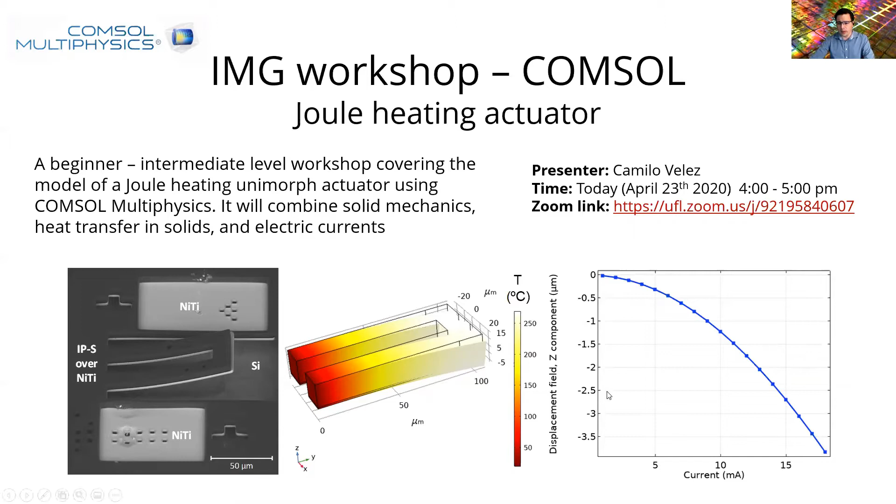So let's start. We're going to assume that people know a little bit about COMSOL, and have done some things. So what we're trying to do is model a Joule heating. I'm going to explain what that is for a unimorph actuator using COMSOL Multiphysics. I'm going to start from scratch, but please feel free to interrupt or ask questions at any moment.

What I'm going to try to cover is some of the geometry and the materials definition, after explaining what is this unimorph actuator. We're going to use some physics: the electric currents, the heat transfer in solids, the solid mechanics, and one that combines the three of them, that is kind of the multiphysics model for COMSOL. At this point, perhaps you're aware that COMSOL Multiphysics is a program that allows us to do multiphysics simulation. It means it's trying to solve the differential equations, the partial differential equations for multiple physics by using the finite element method. So it basically divides the problem into tiny squares or triangles and tries to solve locally for a domain, and it tries to impose boundary conditions and solve for the next domain, and so on and so forth.

We're gonna see the three main components of the studies. It's gonna be, of course, a mesh definition. We need a stationary study, a parametric sweep, and a time-dependent study. So hopefully we're gonna have time to present everything. This model is really very simple, but if we are careful, we are gonna understand this.

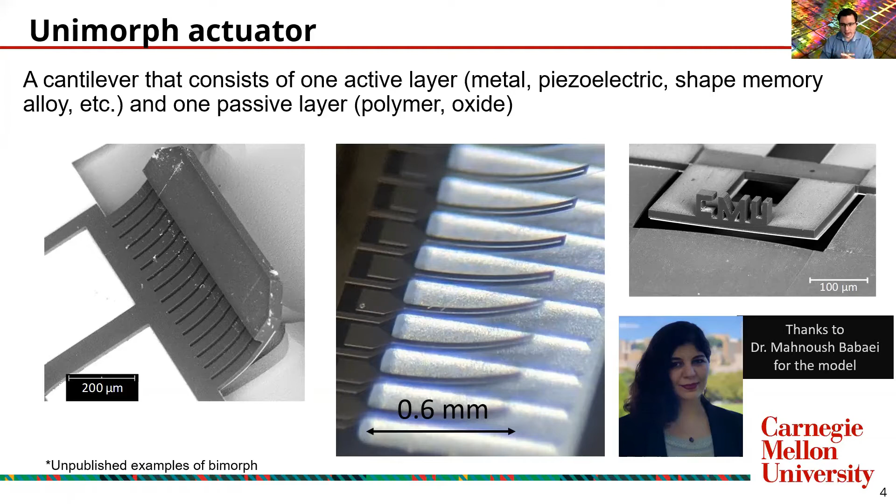I need to thank especially Dr. Mahnoush Babaei. She's a postdoc at Carnegie Mellon as well, and she has been developing most of these shape memory alloys and the model that we're using today.

So as I mentioned before, we have two layers. In a simple beam, it's gonna look like this. One is passive, one is active, and whenever we heat one of these, the temperature is gonna start deforming both materials. Because of the thermal mismatch between the materials, it's gonna start curling down in this case, or depending on the geometry, curl up. For this one, the thermal coefficient of expansion for the passive layer is higher, so it's gonna try to bend forward.

The mechanism we are going to use today is Joule heating. It means we have a metal - this active layer is a metal, we're gonna use nickel. We are going to pass a current through it, and the current is going to increase the temperature on the conductor. We're gonna analyze what is happening in this region, and the change in temperature is gonna cause the transformation and the bending. So it's a bimetal or bilayer problem, and we're just changing the temperature by heating.

So let's start. The geometry is going to be very simple. It's a U shape, basic, and it's 15 micrometers wide and 105 micrometers long. The thickness of the metal layer, which is nickel, is 1 micron, and the thickness of the IPS is 15 microns.

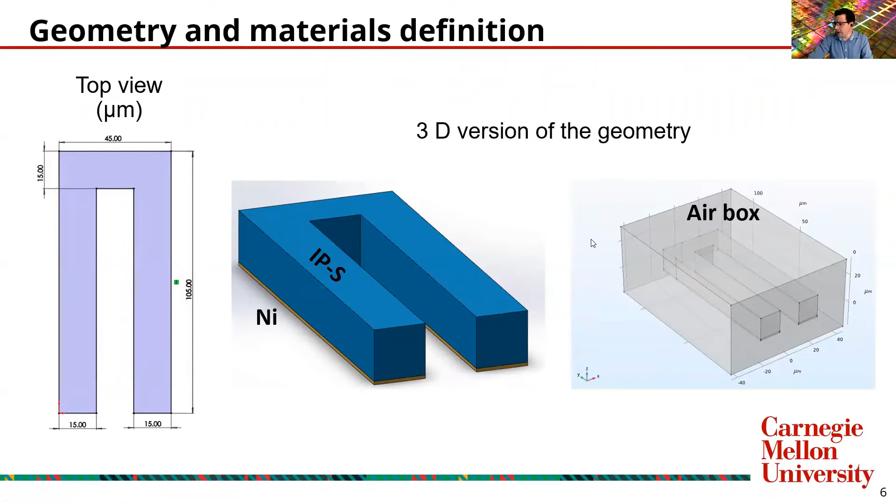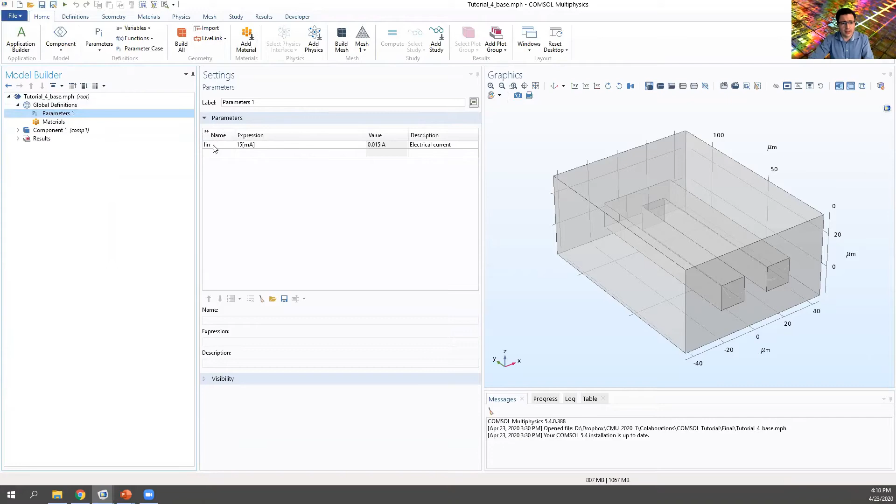So let me jump into COMSOL at this point. I'm gonna jump back and forth between COMSOL and the presentation. For those not very familiar with this, we work here in the model builder, and we have some global definitions. There are some parameters - for example, at this moment we are selecting a current that we call initial current, and it's 15 milliamps. That's the only parameter that we're gonna do. Then we have a big component, and this component is gonna be one single simulation, one nice piece of simulation.

Inside this component, we have the geometry, and I have been working in one work plane. Let me delete this. So basically, in this work plane, I've been drawing these shapes. The first drawing is this box that is 15 micrometers by 105 micrometers long. I just right-click on plane and add a rectangle.

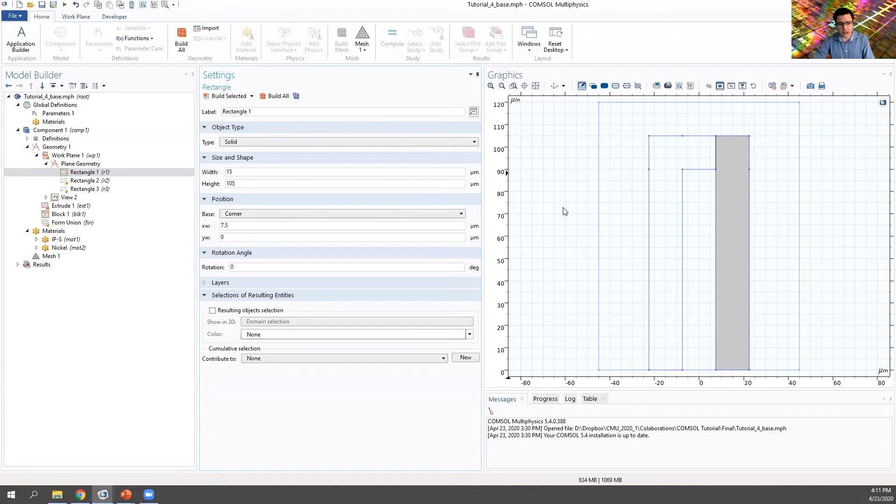And when I add this rectangle, I select the width and the height, and I move this to make it in the center, so I move it to 7.5 micrometers in width. I repeat the same for this other rectangle - you will see that this is 15 microns by 105, and I shifted this corner to 22.5 micrometers.

It's very important that at the beginning you select in geometry the length unit as micrometers instead of meters. Otherwise, the results are going to be completely crazy. So micrometers - we have the 15 microns and 105, and we are missing one component, the top.

I'm adding another rectangle that is 45 micrometers long and 15 micrometers wide. I'm gonna put it at minus 22.5 microns, and I'm gonna move it to the front 90 micrometers. And if I build the selected, now we have this nice shape.

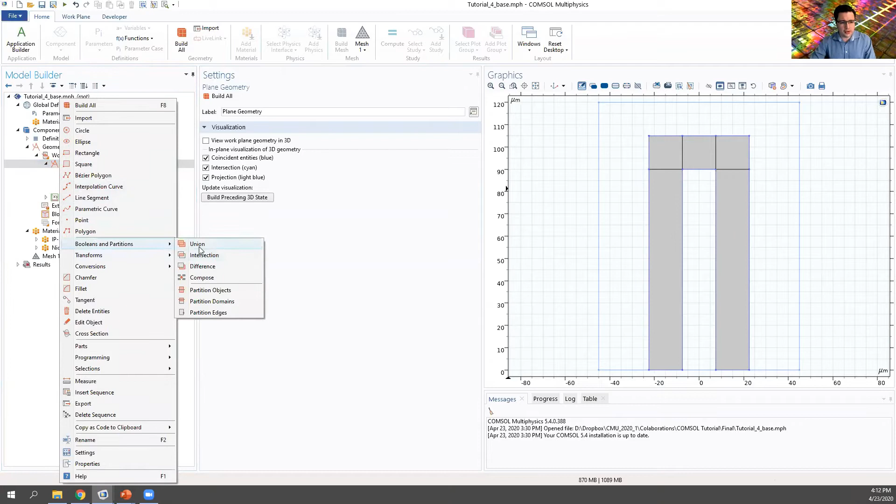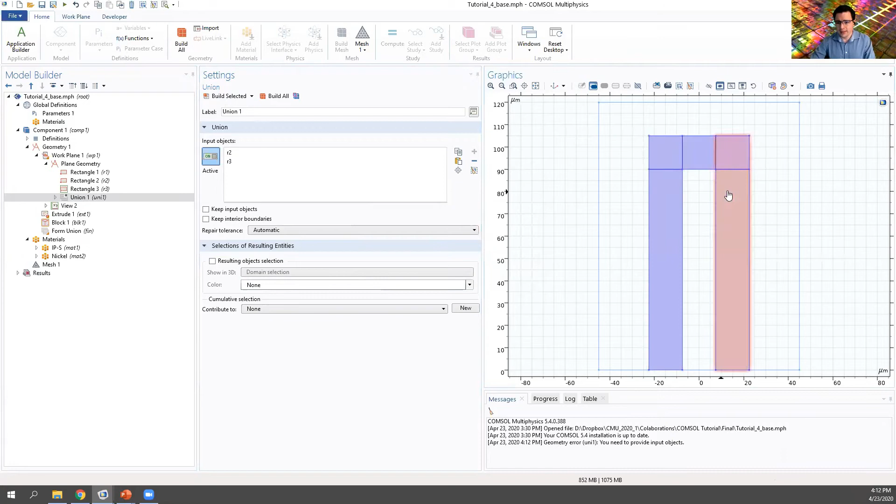For simplicity, because all these represent the same material, I like to use a Boolean transformation - give the union and say please do not keep the interior boundary, so I want to remove these boundaries here. I build the selected - sorry, I need to select the three materials, and I build the selected, and now I have a nice layer.

This is gonna be the fundamental layer for the active and the passive. So let's go for the active layer. At this point we only have this, we have just a layer.

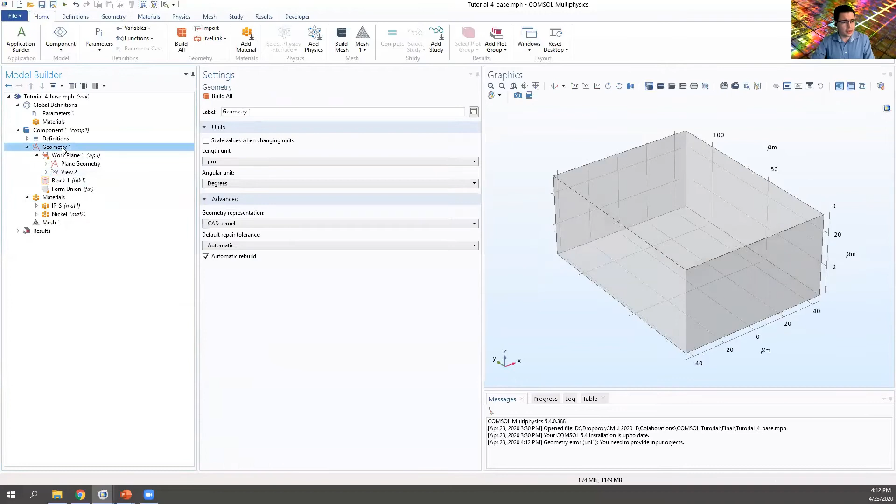I'm gonna right click here and set this plane in the work plane. I hit right click and say please extrude this material. I already deleted it, sorry - I had it for the example, but I want to do it with everybody. So here in the work plane, I right click and say please extrude, and I'm gonna extrude this area. You notice I'm selecting this one. I said please select 15 micrometers and build the selected. Okay, so now I have a nice construction and this is the passive layer.

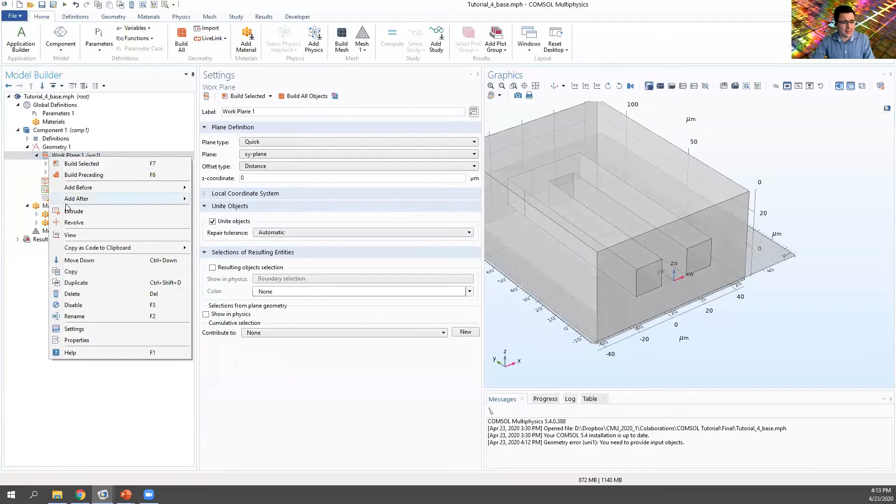What I'm gonna do is duplicate this. Well, let's get rid of the block.

The big block is this one here, and I just right click on the geometry and add a block. I have a nice block of 90 microns in X, 120 in Y. It's very important to understand that this is Y, this is X, and this is Z. And for the height, it's gonna be 50 microns.

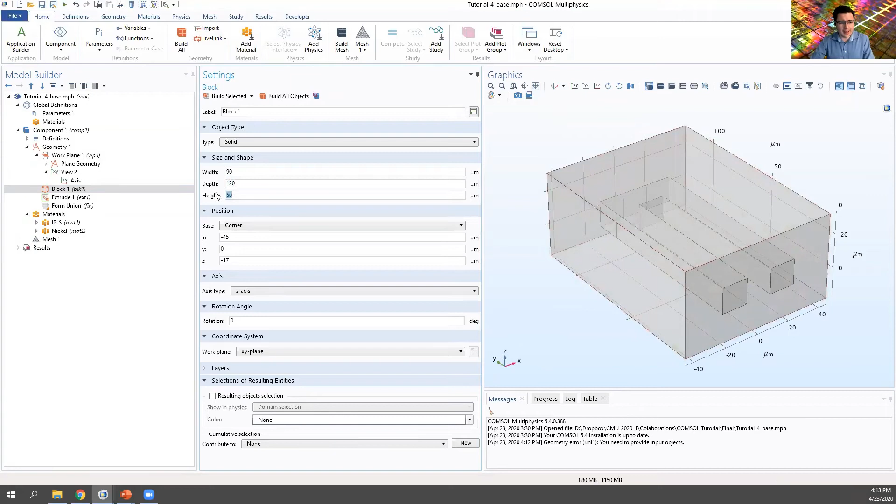But I want this right in this edge, touching these materials. So I move it minus 45 microns in X to be in the center, 0 in Y, and minus 17 in Z, just to be at the center.

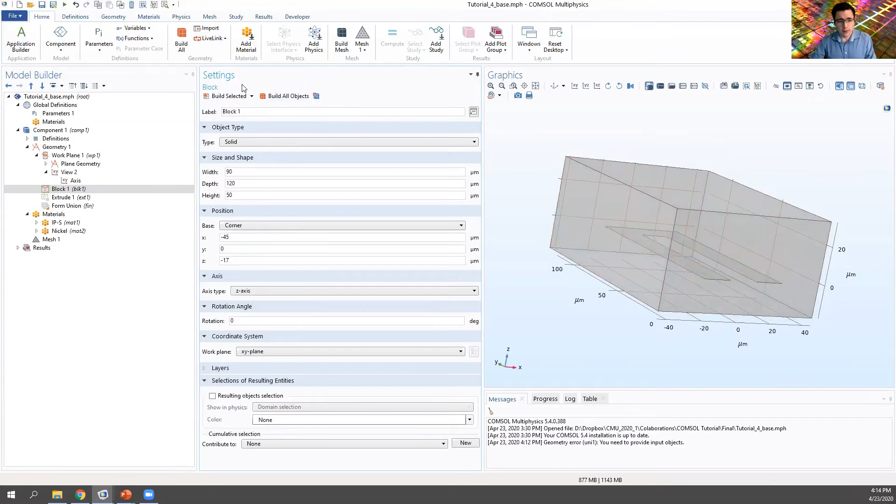So right now I built all the objects, and I have that. The last thing I need to do is define, I'm gonna duplicate this one, the same work plane, to define the active material. So I'm gonna duplicate, it's the same geometry, no need to draw it again.

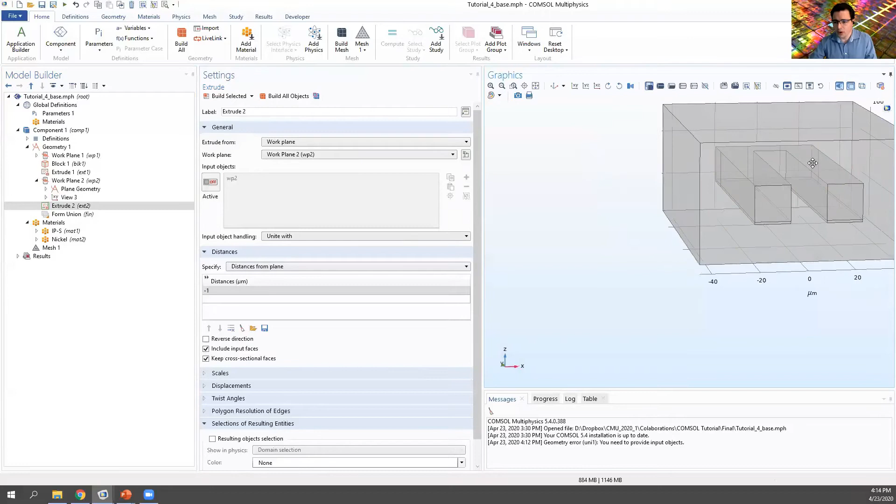I'm going to right click and say extrude, but instead of going 15 microns upward, I'm going minus 1 micron down. So right now it looks like this, where you can see 1 micron of active layer and 15 microns of the passive layer. People will ask me why the difference between 1 micron and 15.

Well, we have discovered that for the different coefficients, this is the thickness that will maximize the work at the end—the force and displacement product at the end. That's why we chose that one after long characterizations and things I'm not gonna present here.

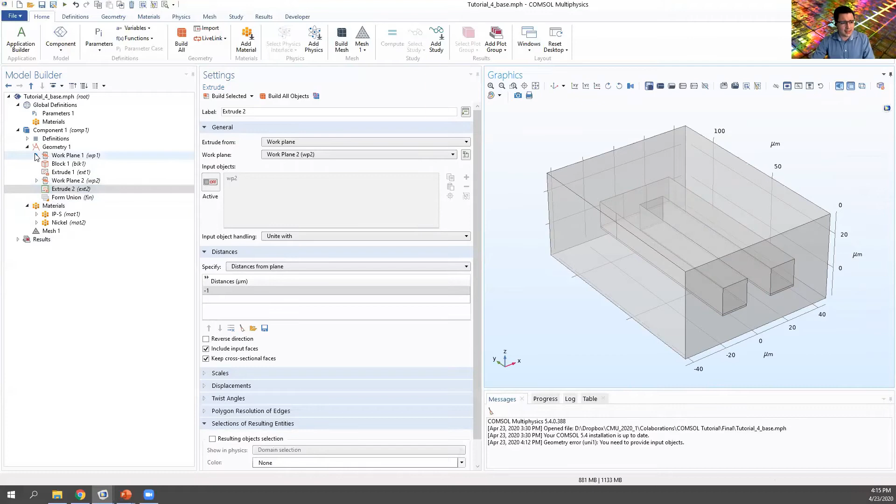The next thing is assigning the material. I already have preloaded 2 materials. One is called IP-S, and I added some thermal values we found in the literature—thermal conductivity, density. The IP-S is a polymer, and we use it as a passive layer because we can 3D print it on top of the metal.

The metal is going to be microfabricated—it's going to be sputtered on top of a silicon wafer. We pattern that one, and then we 3D print the polymer on top. We are using a 3D printer that has a resolution of about 200 nanometers, called Nanoscribe, and the polymer we use with it is IP-S.

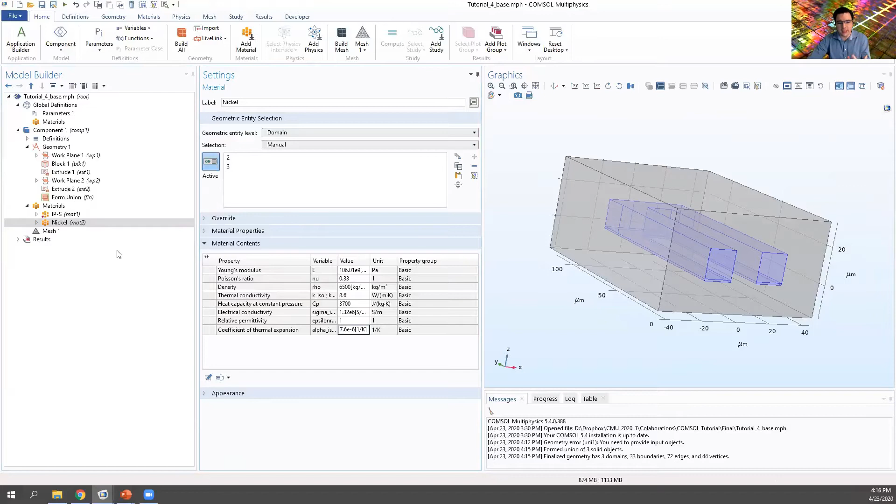So the literature, the vendor, offers a lot of values for thermal conductivity, density, heat capacity, coefficient of thermal expansion. This is the most important one: 52 times 10 to the minus 6. Meanwhile, for nickel, the coefficient of thermal expansion is 7.6 times 10 to the minus 6. So there's clearly a mismatch on this coefficient of thermal expansion.

I need to assign... yeah, I see that somebody's having a question. Let me see.

Yes, we have 2-photon polymerization and we have the Nanoscribe, and that's what we are using for this. So welcome, happy to help anybody who is in need of one of those.

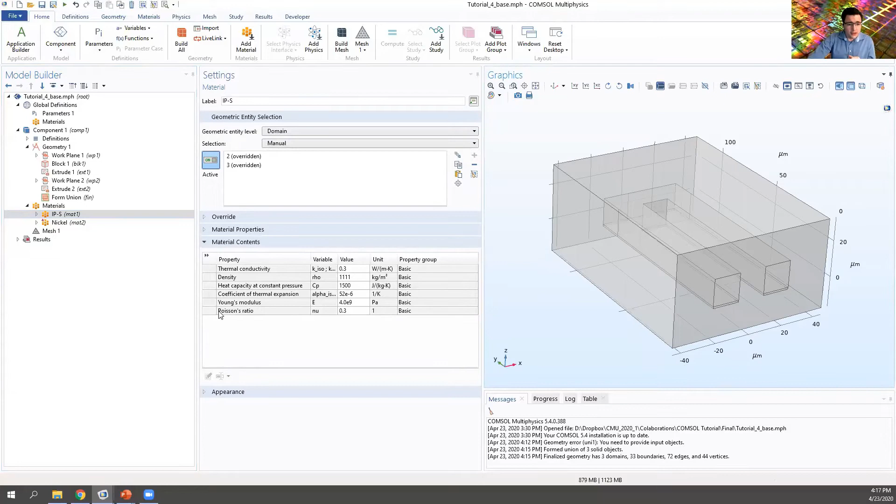We are using this for fast prototyping, trying to understand the actuator better before we fabricate it at mass production. So for this one, we need to assign a model, a domain.

Right now you can use the scroll wheel of your mouse to select different volumes. So I'm gonna right click on this one, select the other one, and right click. Now I'm only selecting the nickel for the conductive part, and for the IP-S it's going to be the other part, the polymer.

I'm gonna add another material, and this is a conventional library from COMSOL. So I right click and add materials from library, and I'm gonna use air. I'll select this material here.

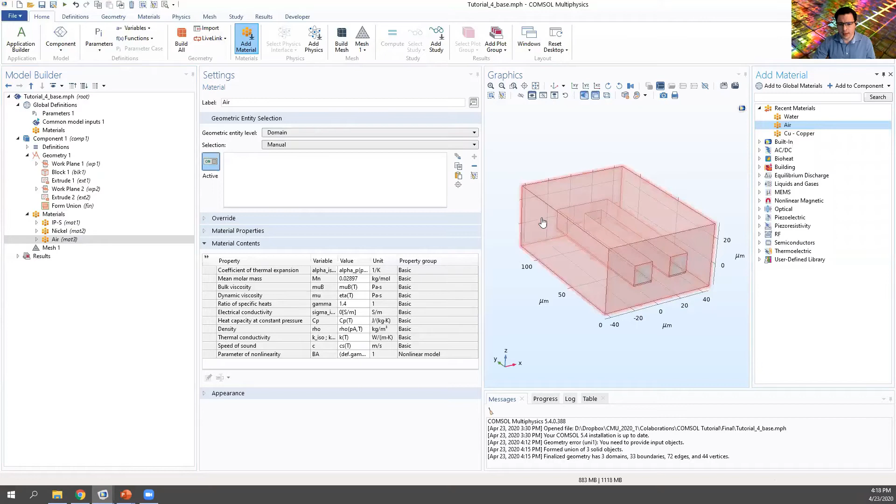Okay, so I have defined all the materials for all the blocks I already fabricated. At this point, it's safe to save this file, just in case, and we can continue with the presentation. Any questions so far?

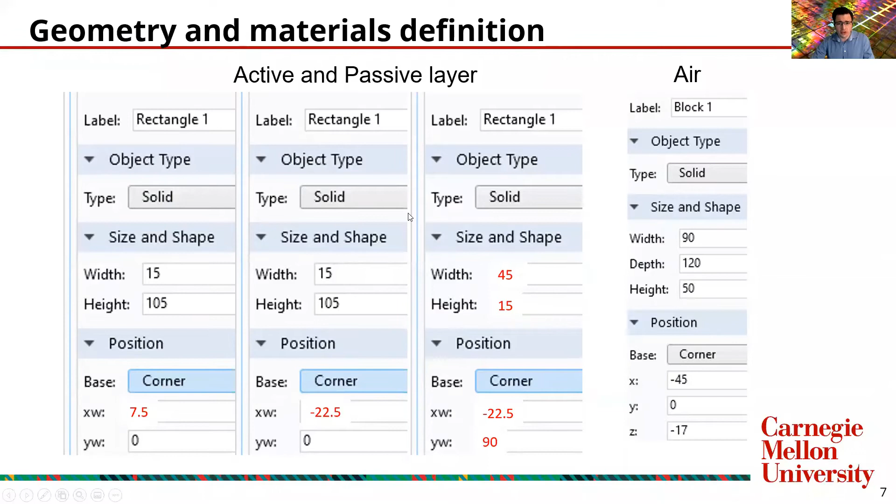Okay, so those are the geometries we defined, those are the dimensions—I'll provide this presentation in case you want them—and those are the material conditions, which we found in the literature.

This is very important: for people who are new to COMSOL, the most important work in COMSOL is validation, okay? And the validation starts from the material properties. We have spent on these modules perhaps 1.5 years just tweaking the simulation, with one postdoc completely dedicated to this. I'm not trying to discourage anybody—no, this is easy to pick up.

The steep curve of learning for COMSOL is going to be like a couple of months, and then you can start doing amazing things. But it's not enough just to have a model, you need to validate it. You need to find out, for example, for your specific material, what is the thermal conductivity? Let's create an experiment to measure this, because perhaps it's not the same value we've evaluated or found in papers or books. Perhaps our material is completely different and the modulus is different, so we need to measure it. So validation on every single step is crucial in COMSOL. It's the most important part.

So let's jump into the physics. Once you understand the variables, it's important to understand that, as with any software, it's trash input, trash output. If you use as input data a value you haven't tested, or an equation you're not sure about, the result is going to be crap, to be honest. So don't expect the software to save you. This is a very complicated software trying to solve very complicated partial differential equations, and you need to own the physics. You as a researcher need to really understand what is happening at the fundamental level. The simpler and more fundamental you get, the better results you're going to get.

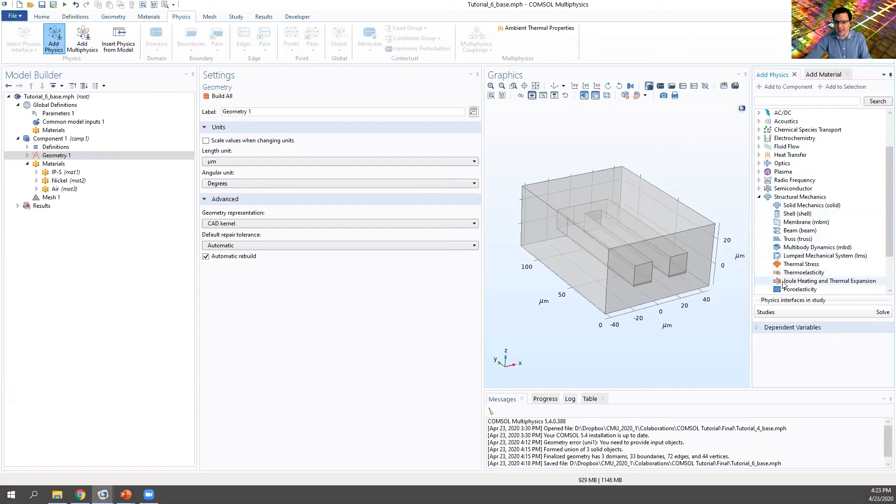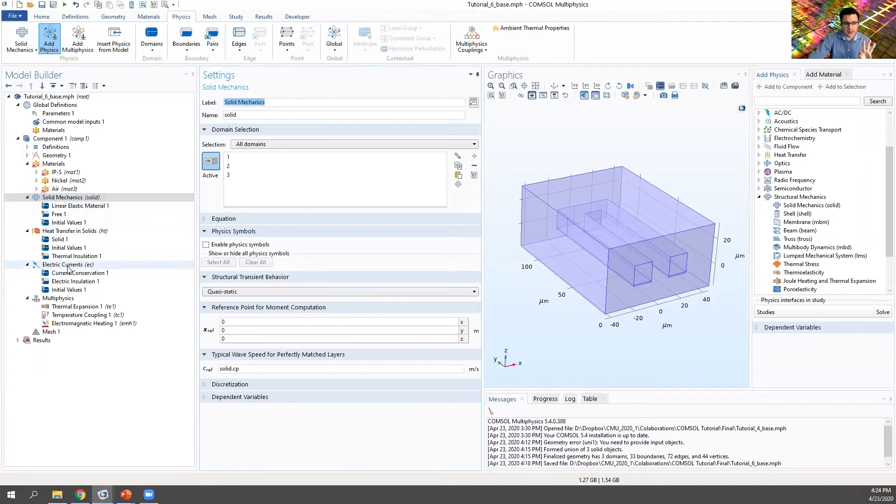In this case, we are going to add the physics. I'm going to add a new physics that's in structural mechanics, instead called Joule heating and thermal expansion. It seems like one model, but in reality it's combining three. If I double click this, you'll see he already populated the system with three modules, like heat transfer, solid mechanics, and electric currents. Let's start with the electric currents because it's the first one I mentioned.

First of all, we're not going to solve it in the air. We're not going to solve it in the passive layer - we're only going to solve it in the active layer. Give me one second to open the model here. Yeah, sorry about that.

So for the electric currents, we only care about this one. We're going to have a discretization that is quadratic - this is just for the solution. The current conservation, we're not going to touch this part. The only thing is we need to change this from non-solid to solid, because this part is solid, it's not air. We're not trying to solve the equations on air, we're just trying to solve them on a known material, okay?

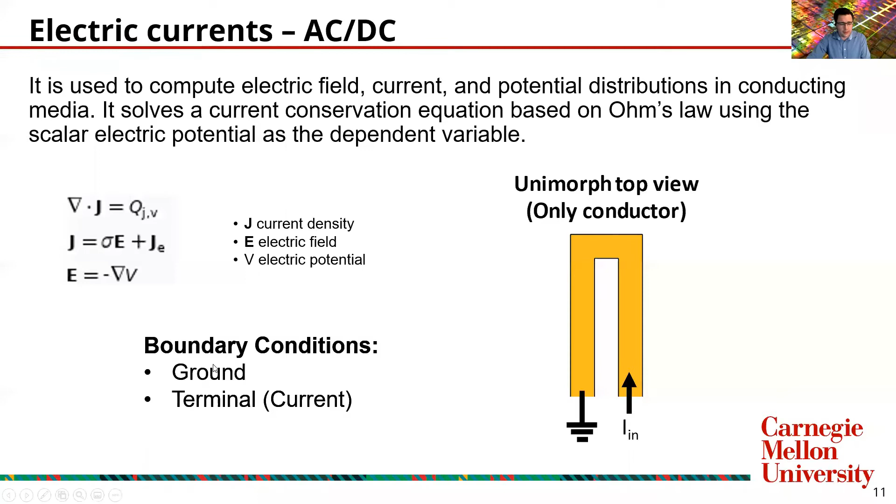So that's very important. The second part, electric insulation, we're not going to change that. The initial value - this is pre-solved for COMSOL, we don't need to change it. What we need to change is add the two conditions I mentioned before, ground and terminal. How do we add that? We right-click on electrical currents, and we say here, on a boundary, okay?

You have three types of conditions: first, a volumetric condition, then a surface or boundary condition, and third, a point condition. You can select those three types in COMSOL, and depending on the condition, you're going to modify the equation.

If you go here, electrical current equation, here is the equation we are trying to solve. Remember I mentioned the electric field before. So if we add more of these boundary conditions, this equation is going to start changing, and we are going to start adding factors.

Okay, so right now we are going to say, please give me a ground. I need to select the ground. How do you zoom? You usually use the scroll wheel, click with the wheel, and move up and down.

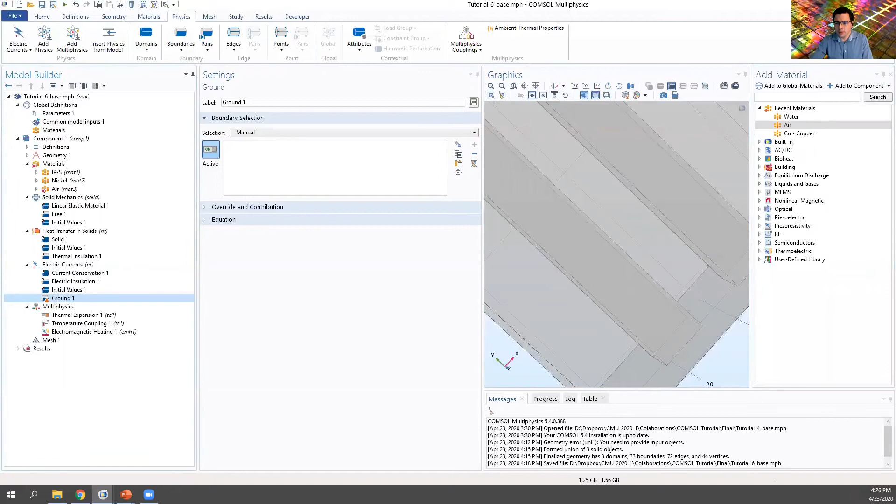You click the wheel and move up and down, and that's how you zoom. Let me close this so we have a better close look. Up and down, and you zoom. If I move the right click and move, I'm going to pan this, and if I move the left click, I'll displace and rotate this freely. This one is zoom out, and this one goes to the original view.

So quickly, I'm going to select this boundary as my ground, and I'm going to select the other boundary as my terminal. So I go here and say please use a terminal, and this terminal is going to be this one here, and this terminal is a current that we have defined in parameters as initial input.

So right now, go to terminal and say initial input. If everything is correct, if initial input was well defined in milliamps, this terminal here is going to be in black. If you define this in volts, for example, you made a mistake.

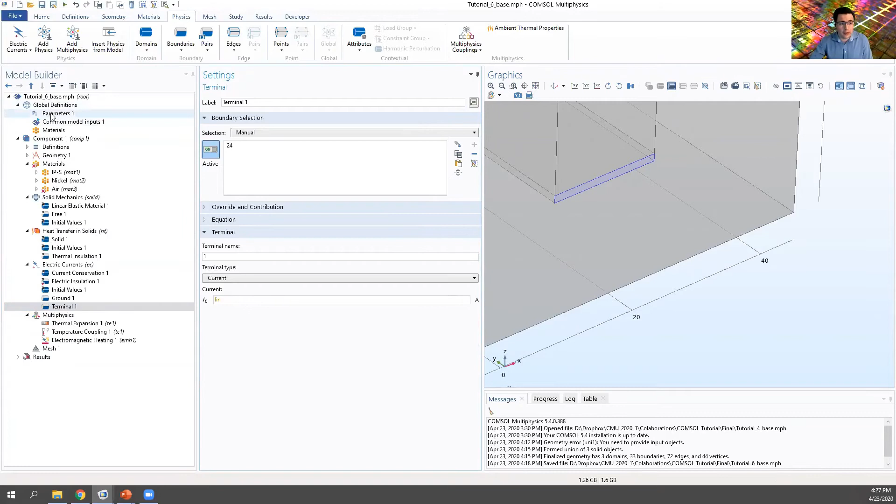Let's say that you make a mistake here. The terminal is going to be in orange, and it's because you have a problem defining this variable here. So that's pretty useful information. Right now we finish with this.

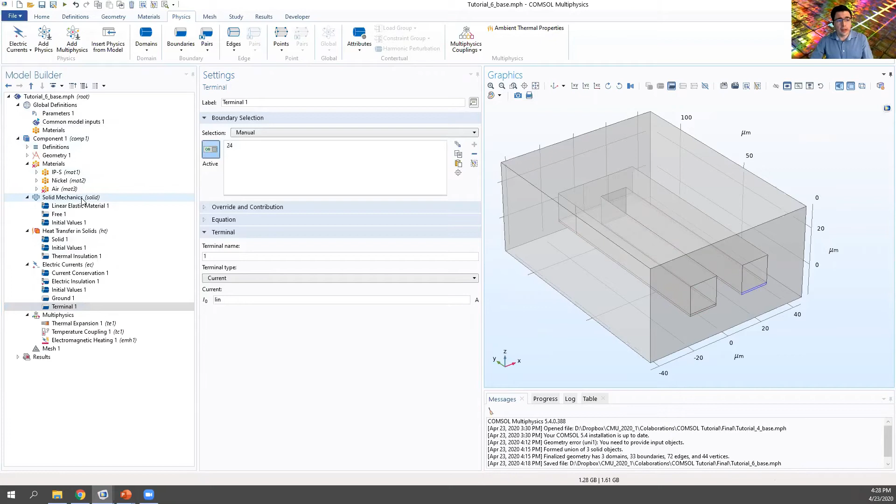I'm going to take this moment to mention something very important here. Look, I know that sometimes COMSOL can be a little frustrating because it has a lot of information, but you need to seek help in the software all the time. The best way to do it is wherever you find a specific topic that you don't know, you go here to help and click in help or press F1.

And if, for example, you don't know which parameters to use in the terminal, wherever you are seated, the help button is going to immediately open a window here and tell you, hey, look, for terminal we mean this. Look, the terminal is a node that provides boundary and domain conditions, and the options you have for this terminal are power, voltage, and circuit.

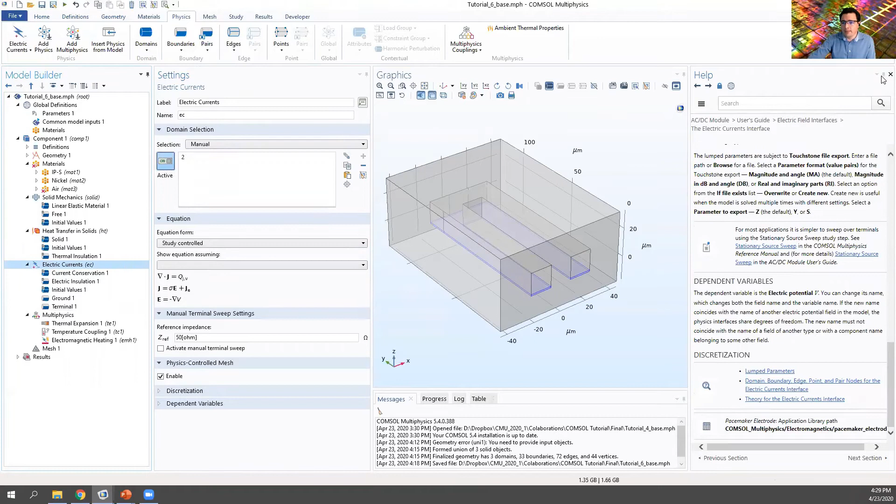So I can change voltage, current, circuit, or terminated, or power. This is the best source of information. If I go to electric currents, it gives me all the information, all the different buttons that I can select are explained here. This is very, very useful. Please use it. I'm going to go back to the presentation.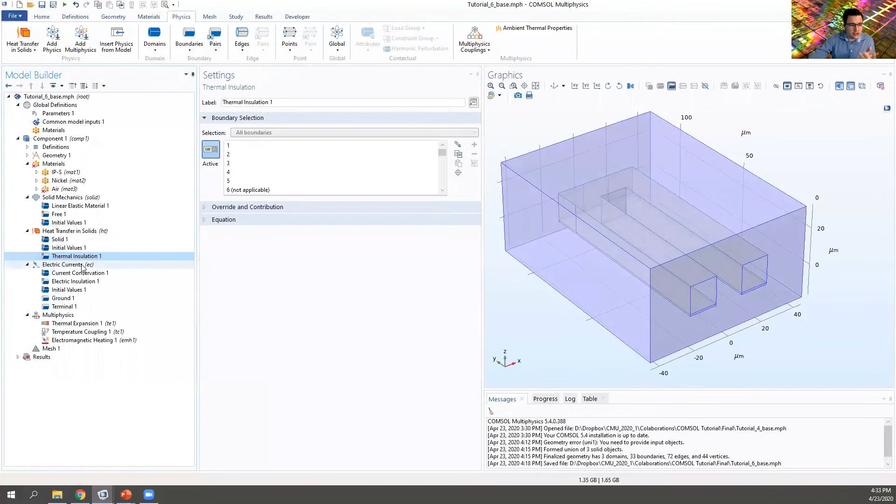So that's why we select quadratic for this specific problem. We have the solid, and we're not going to change anything on this one. And we have the initial conditions and the thermal, but what we are going to add is a boundary condition that sets temperature.

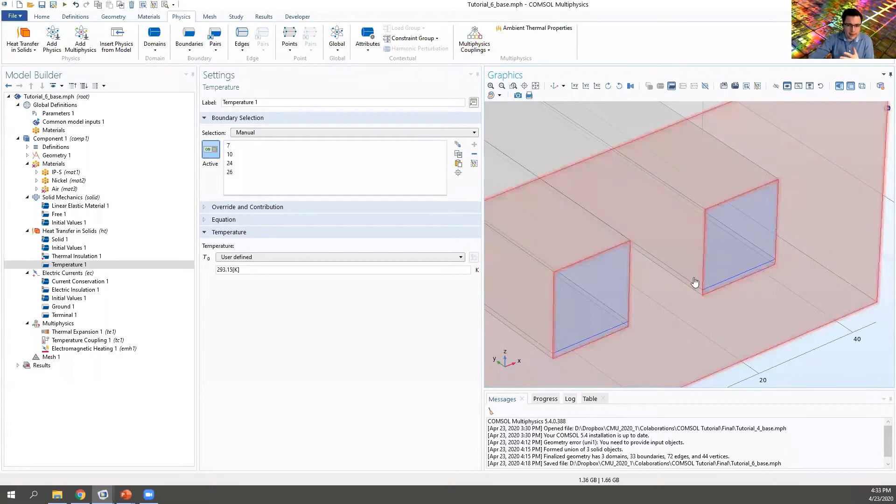And the temperature that we're going to set is for this boundary, this boundary, this boundary, and this boundary. These are connected to the silicon wafer, and the cantilever is going to be in the air at some point. So this is connected to room temperature, and the rest of the beam is dangling in the air, so we need to use a different model for that.

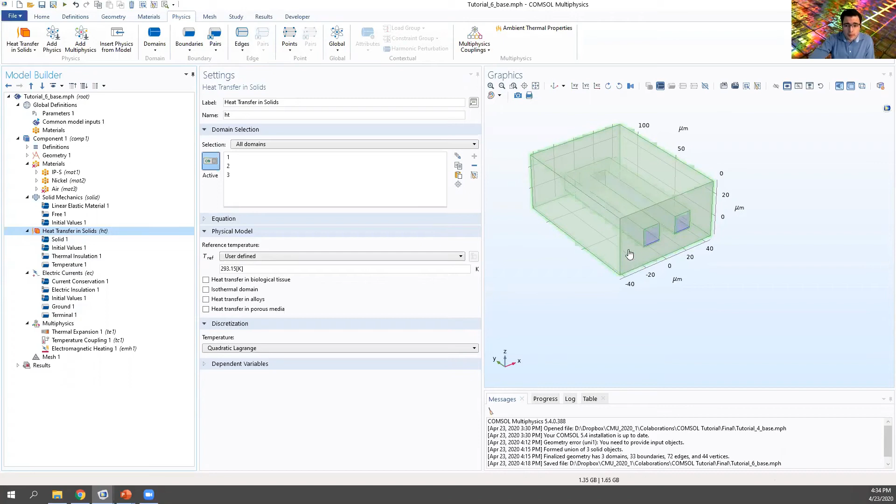Very important, look, because this is a very common mistake: on top of each physics, you need to be careful selecting the domains you are using. Remember, here we are using the electrical domain, but in heat transfer, we are going to use absolutely everything, including the air. So be sure to link it, otherwise you're going to have trouble solving the equation.

So the boundary condition is temperature, and the other one is convection in fluid because we have air. So right click and you're going to hit volumetric condition, and it's fluid - that's the volume that we are going to have. And we are going to select... because I deselected this one. Okay, I have fluid here.

Don't pay attention to this Young's modulus and Poisson ratio, I'm going to remove it in a couple of steps. But here in fluid, I need to describe the fluid that I'm using. Not everything, but just the fluid - the other things have already been defined.

And for this one, instead of being a gas liquid, it's moist air because it's ambient air. So this is most closely related to just common atmosphere under no vacuum. So right now we have fully defined the heat transfer.

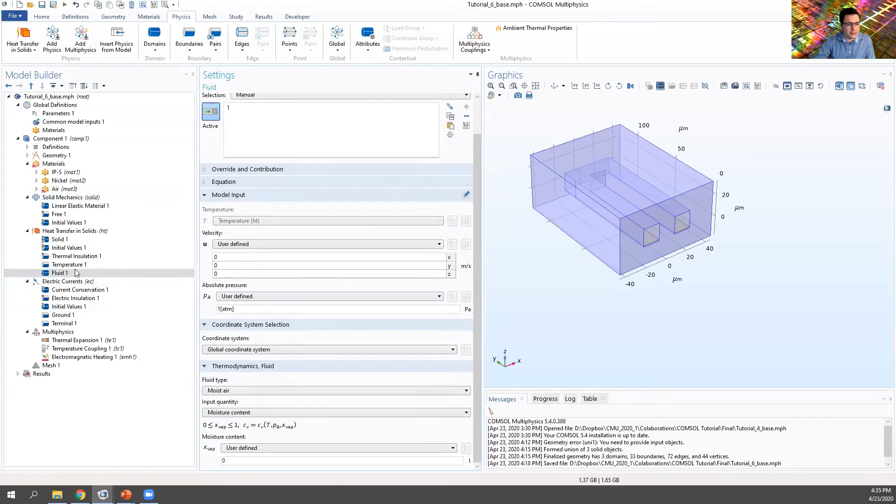So if we go back, the next step is going to be the solid mechanics. Solid mechanics belongs to structural mechanics, and it's trying to do the simulation of 3D and 2D bodies. It has many fundamental equations inside, trying to define displacement, stresses, and strain. I would say it's one of the most common modules in COMSOL - almost every module considers this structural mechanics. So the only thing is, we're not going to be able to see the equations except if we select a specific boundary condition.

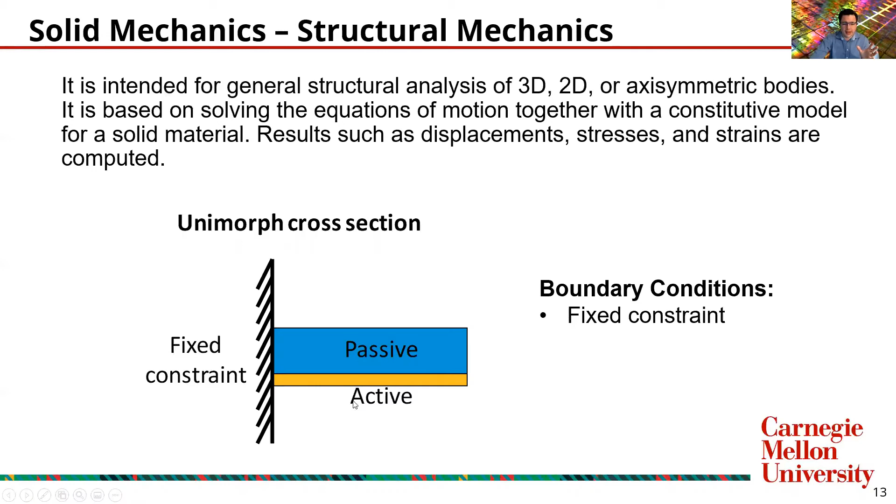The only boundary condition is that this is a fixed constraint, everything else is going to be free and move freely - that's the only thing we're going to do. In solid mechanics, the only thing is that we are not going to simulate the air.

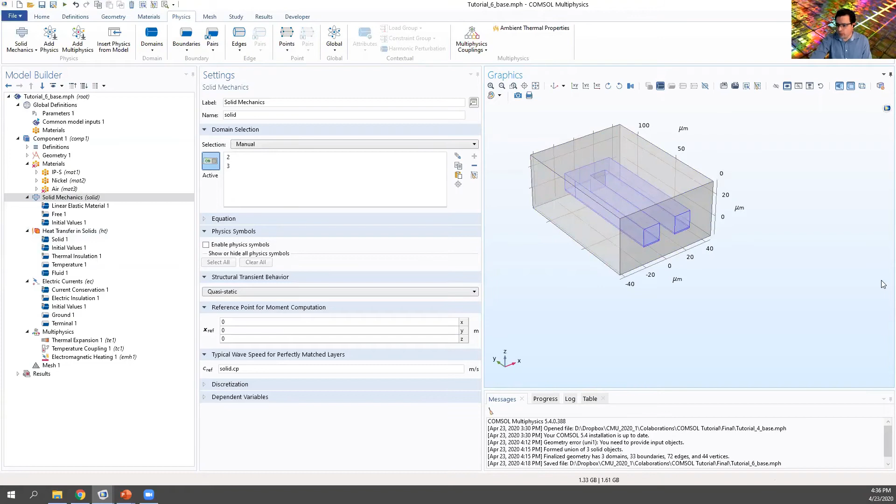We're going to remove the air, and we only care about the beam. The air is just for the heat transfer. So because we just care about the beam, we can remove it here, the air, and select the rest of the model. One important thing here, linear elasticity.

This is already common for COMSOL. Depending on the problem, you will need to change this one, but for this case, we don't need to touch it at all.

And finally, we are going to add the simple condition that is a boundary condition. We said like this is a fixed constraint. And we need to define the fixed constraint for this one, this one, this one, and this one.

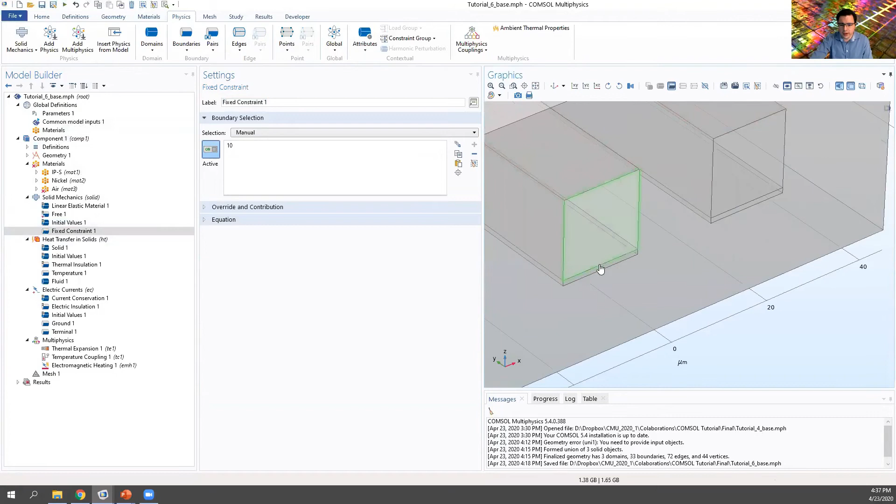If we look carefully, the multiphysics are the combination of all these three. And we are saying, first, we are going to have a thermal expansion, and this thermal expansion is coupling heat transfer with solid mechanics. Internally, it's doing it.

Internally, if you can find the equations and try to see what that is. But the important thing is that they have been selected for you. You don't need to change this at this moment.

I really suggest you start changing these parameters only if you are very confident with your physics and confident with the information that you have for the model. Otherwise, try to follow the COMSOL advice.

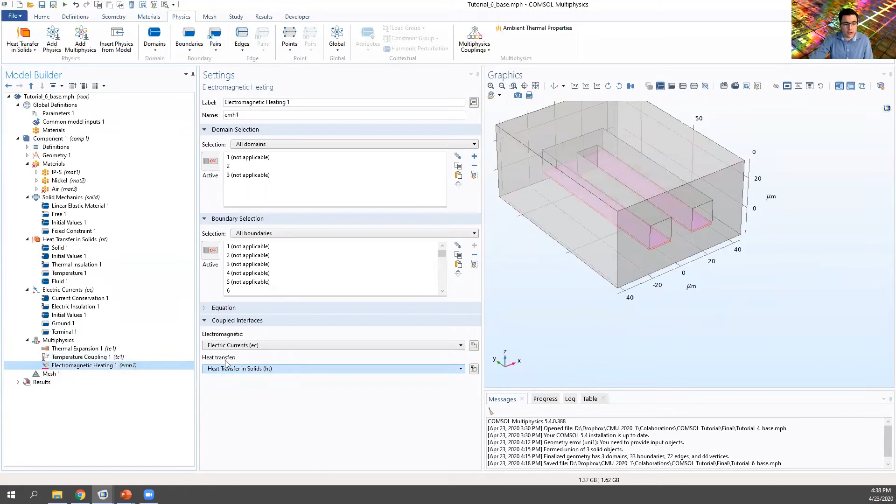Some important thing here is try to use the mechanical losses just to have more accuracy on the domain. We have the temperature coupling, and it's heat transfer and solid mechanics. That makes sense. And we have the electromagnetic heating, that is electric currents and heat transfer. But I'm not doing anything else. After that, I'm going to select the mesh and build all.

Camilo, sorry to interrupt you. I think someone has a question, so I just thought, if you can—sorry. In the chat. No, I'm not able to. Can you read the question?

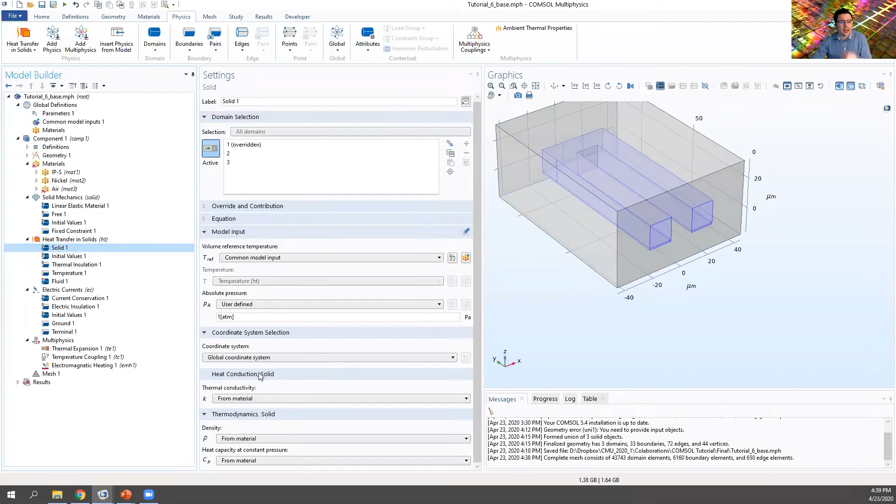The question is, won't the surface contact between nickel and IP-S also need a boundary condition? Yes, you can create a boundary condition for that, but for this specific problem, it's just a conduction material, as I mentioned. And when you use conduction material and you find heat transfer, this solid one, it's doing a conduction module, so they already have inside these two models and coupling inside.

Just in case, you ask about the solid mechanics—no, right now, because for what we're doing, we're just sputtering, and we are observing that there is no effect of one layer over the other.

For a more advanced module, we understand that one of the layers produces an external strain, an internal strain on the other one, and that's where we include that additional layer. But I decided not to include it here just for simplicity on this model. So the answer will be yes, but based on specific cases, not in general. Right now we are just assuming that they are perfectly coupled.

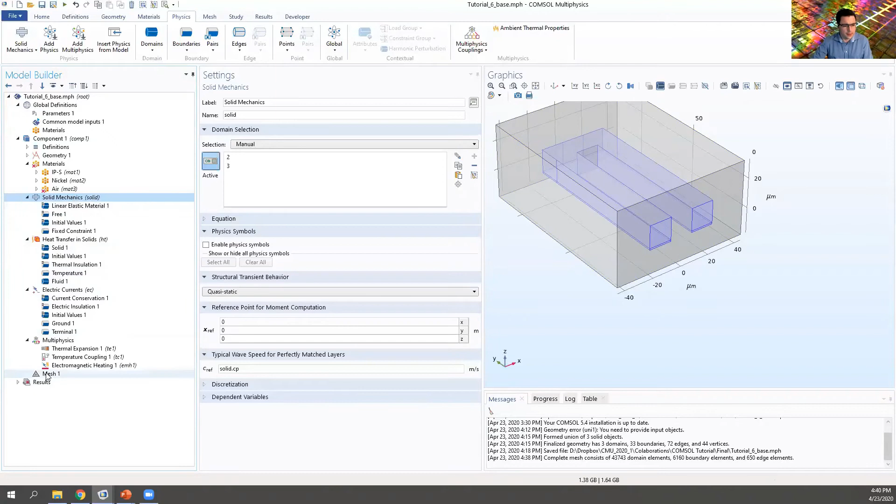It's very important that you define a good mesh. Sorry, give me one second. So I wrote something: that you define a good mesh. Most of the problems that we are going to have, it's with the meshing.

Right now, this model is very forgiving, and we can have a coarse mesh. I'm not going to talk about that one. If you have some special needs for the mesh, please let me know and I can help you design the best mesh for that.

One important problem you can try to solve is to try a very simple model and generate, for example, a volumetric temperature, the maximum temperature, and run it with a very coarse mesh. Then refine the mesh and run it again. Refine the mesh more and run it again, and try to track the temperature for different meshes.

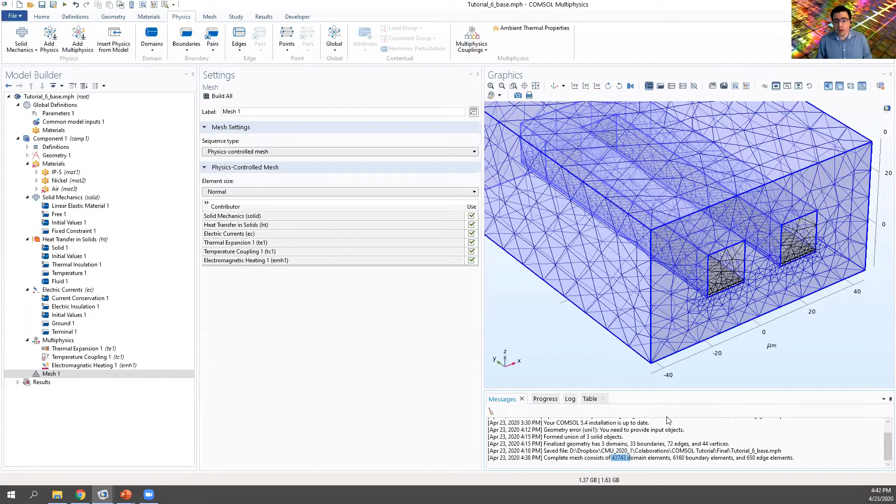There is a point where the model just stabilizes with the number of mesh items, this number of domains that you can see here. Generally speaking, less than 100,000 works good, but it depends on your specific physics and your specific geometry.

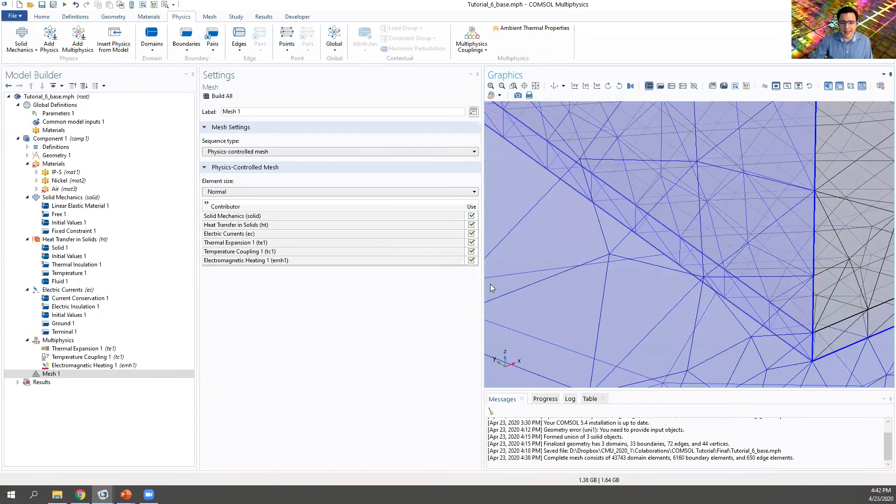If we do, for example, an analysis through the thickness of this layer, look, we only have two triangles here, so it means we only have two data points here, and that's extremely low. So if that's the case, we will need to refine the mesh on this one. But for this model, we don't need it—that's good enough. It depends on your specific attributes and your specific problem.

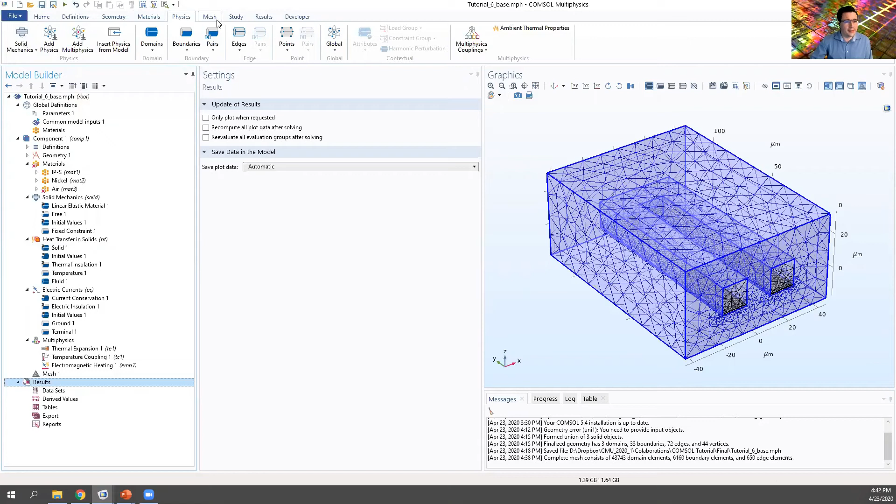Now, the most important part is we're gonna simulate. For the simulation, we just need to add the studies. The first study that I'm gonna add, in the study group, is gonna be the easiest one, the stationary.

If your model is very well constrained, very well defined, this stationary should run very fast. It should take less than a minute, less than 2 minutes, and everything goes smoothly, and you will have a nice solution. This is the first test that you need to do.

If something just pops up, it's because you are missing some of the variables or some of the nodes. You forget to make a click on one specific boundary condition. Look, COMSOL is not taking very long, and it's giving me a result for this type of model. So it's very important that you have this simple test that proves that whatever you have, it's good.

It's part of the validation. You need to do this validation. You need to do experiments, not only in the lab, but experiments here that give you confidence that the results are correct. For example, if you're dealing with currents, just verify that the current multiplied by the resistance is equal to the voltage at all points. Otherwise, you're having trouble at some point, and some material hasn't been well defined. Those little verification points will save you a lot of time and a lot of problems.

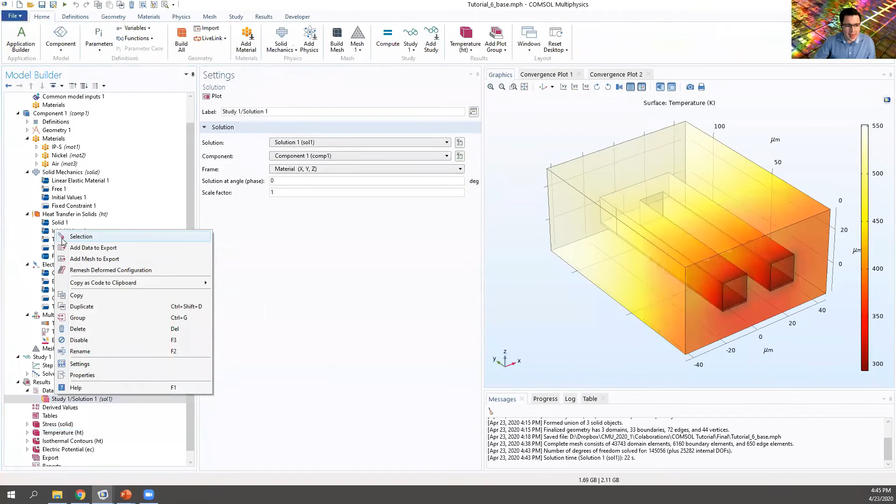In the data set, I now have the study and I can add a selection in the study. In that selection, I can select the domains, and I can say I only want results for the beam, I don't want the air. In the same way, I can use this to click and hide my air. When I do this, the rest of the simulations are only gonna see the beam, and that's the biggest advantage. So that's exactly what you should do to try to simplify your solutions.

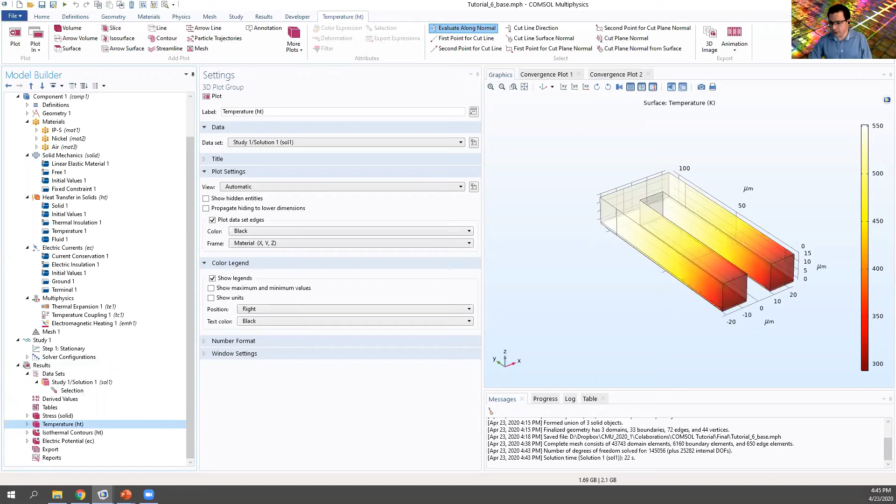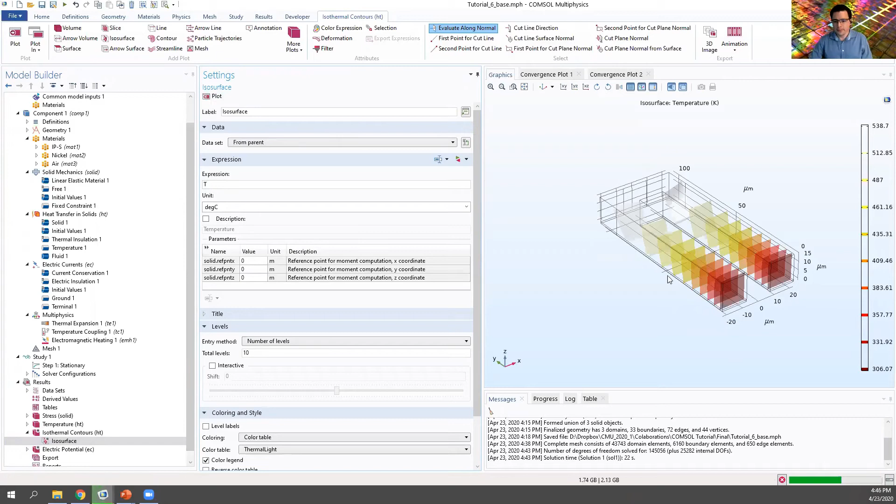The other thing, that's the easy one: this is only one current, 50 milliamps, and I can have the isothermal plots. Right now, I don't want the isothermal to be in Kelvin, I want it to be in degrees C. That's very easy to change. Now I change it to Celsius, and I have the electric potential.

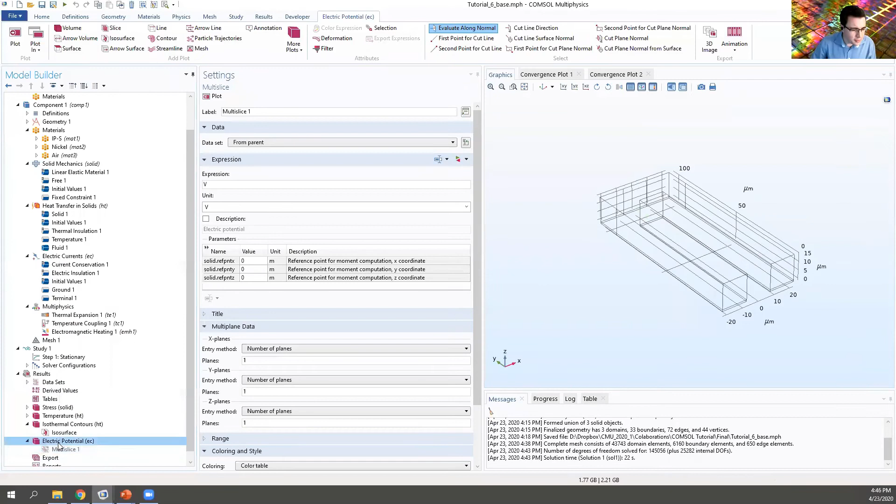I don't like these bars, these slices, so personally, instead of a multi-slice, I try to hide this one. I'm gonna disable it and use just a surface. And instead of the solid displacement, I'll do electric currents, electric potential. So now I have a surface of the voltage, perhaps in millivolts. Look, it's millivolts and the current.

But this is not enough. I need more information. So the next study that I'm gonna add is going to be the parametric sweep. What is the parametric sweep? Now that I define a variable here, a parameter that is current, I want to know for different currents, for example from 0 to 18 milliamps, what is going to be this deflection. Because so far I just find one deflection and one stress, and it gives me only one point. But I want to know a little bit more. So I'm going to add the parametric sweep.

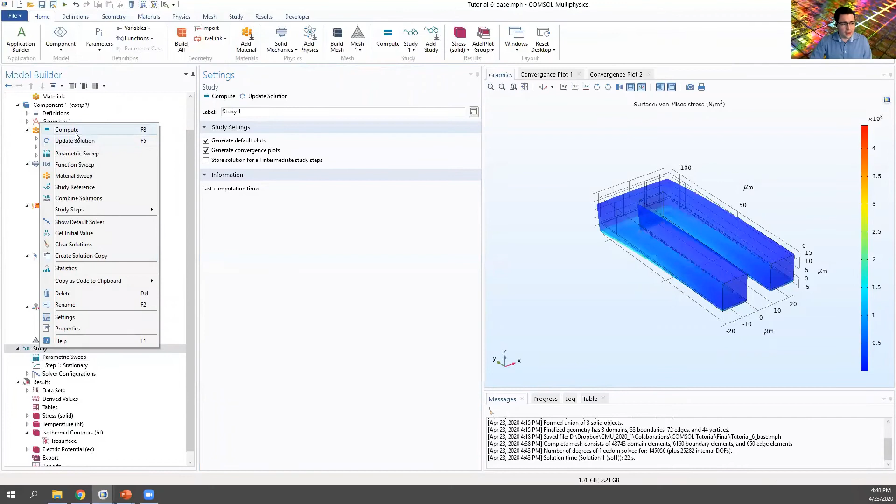In this parametric sweep inside study one, I'm going to add the current, and I'm going to add a range starting from 0 in steps of 1, stopping at 18 milliamps. And then I'm going to run the study, I'm going to compute this part. I already know that this takes a little while.

So let me bring the solution already for this one, because look, the stationary takes like 30 seconds, but if I'm going to run 20 of those, it's going to be 30 seconds multiplied by 20, so it's going to start increasing the time. I already solved all the problems and all the times for this model and did all the solutions. What I'm going to create is just nice plots. So let me save this, I don't want to damage it.

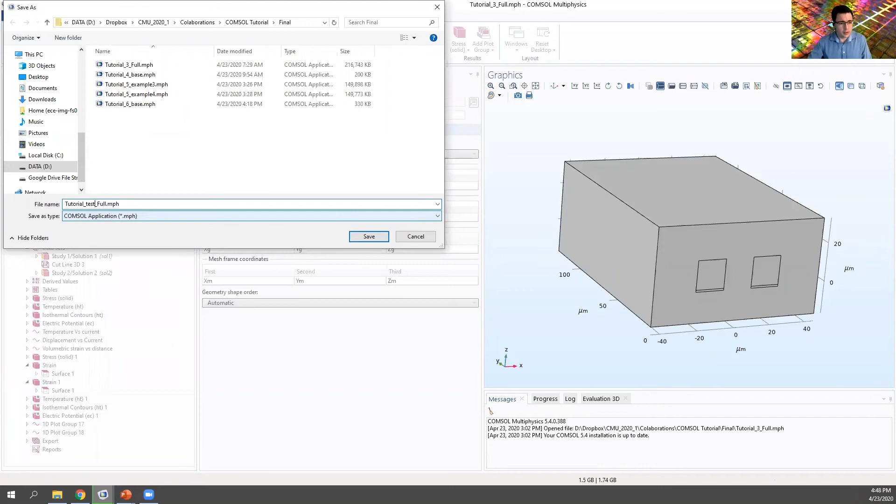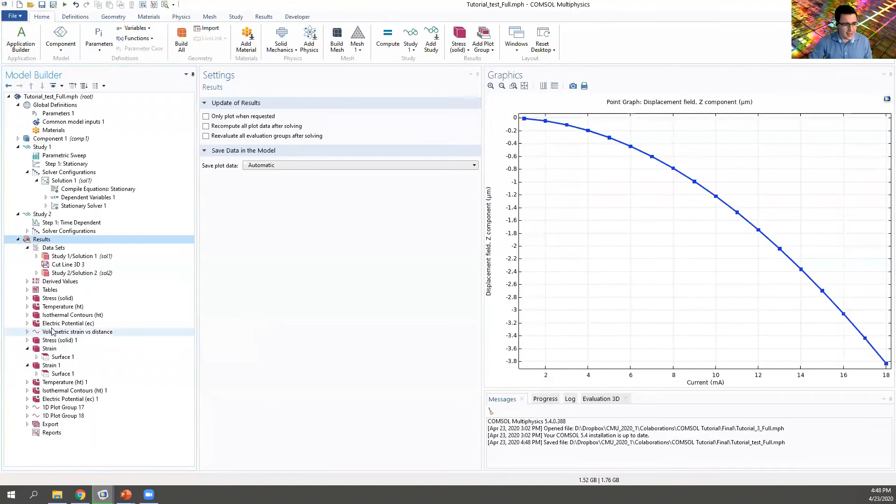What I'm going to do on this model is remove this one. As I mentioned, I already ran the simulation, but I'm gonna do this test with you. It's like a cooking show, you already have the turkey finished. Sorry, give me one second.

Okay, so here's what I'm gonna do, don't pay attention to that crazy one. We have the same stress, but when I finish running the parametric sweep, I'll have multiple values of current from 1 to 18. At different currents, I'll have different behavior. So what is the behavior that I'm gonna analyze?

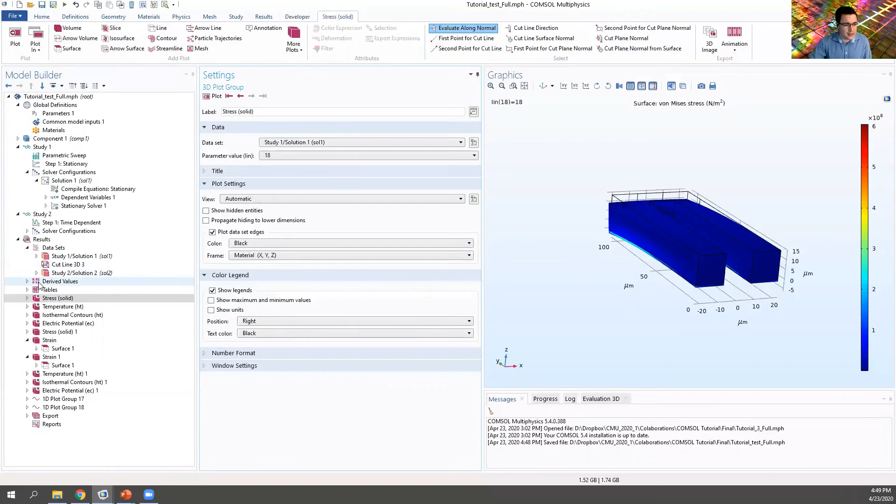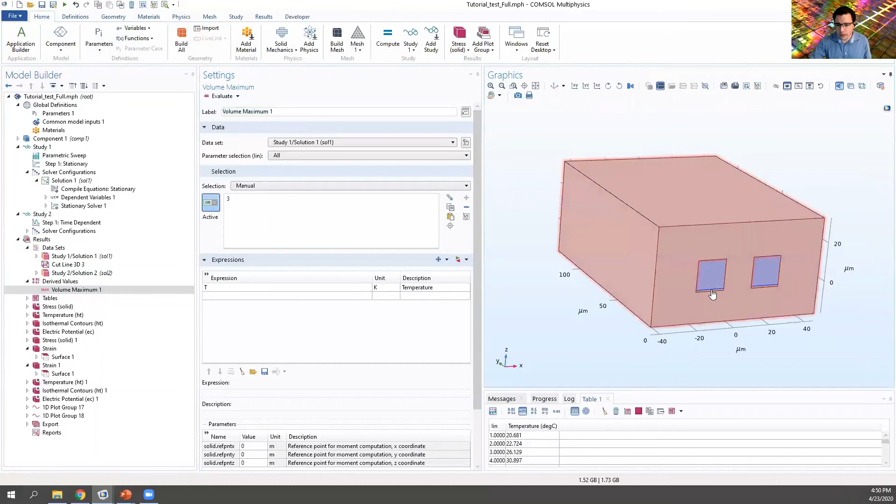First of all, I want to know the temperature at the different currents. So let me remove this. I'm gonna add here in derived values a maximum, and this maximum is a volume maximum. This volume maximum is for the two volumes wherever we have... let me remove this one for clarity... wherever we have the beam. And I'm gonna evaluate the maximum temperature in degrees C, then hit evaluate.

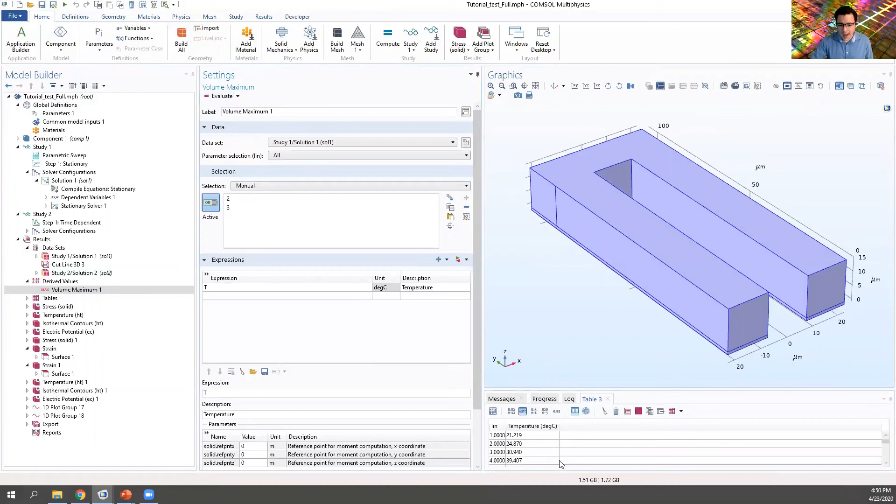And now that we evaluate, we create a nice table here, table 3. Let me delete these ones, it was from the previous model that I ran. But this value, I'm gonna evaluate again, and immediately it pops up a table here, table 1.

What I'm gonna do is right click a 1D plot, and in this plot add a table graph. The table I'll use is table 1, and I'll say plot. So right now I have my input as current from 0 to 120, and it's running the temperature between 20 and 380 Celsius. That's exactly what we wanted for this model, what is the temperature.

Now, after knowing at different currents the different temperatures, the next question is, how much is the deflection? So I can right click and add a 1D plot. At this point I'm not gonna generate a table because I'm gonna do a measurement of a single point, and the single point is gonna be this little fella here. What is the deflection, and in which axis?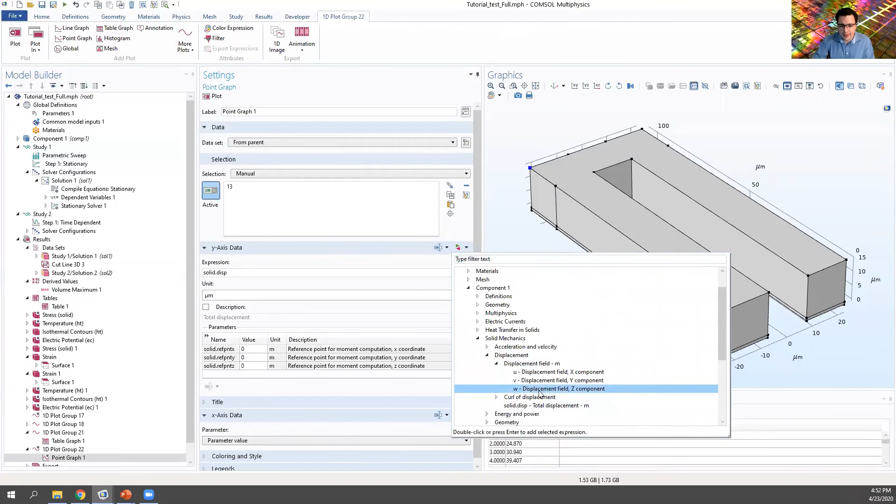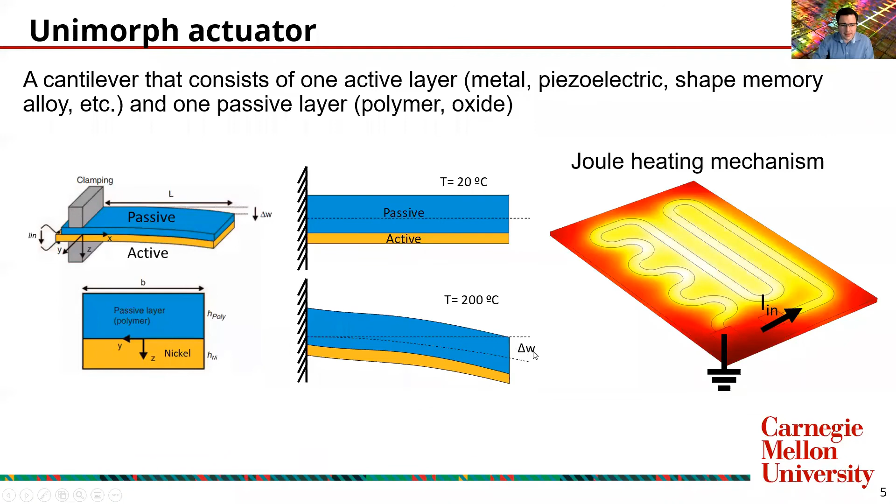So I'm gonna change here to replace the expression, and I'll say, okay, in the solid mechanics, what is the displacement field, and what is W? W is the displacement field for Z, the Z component. If you remember, when we started defining this at the beginning, I said the displacement here is my delta W. That's exactly this W that we're managing here.

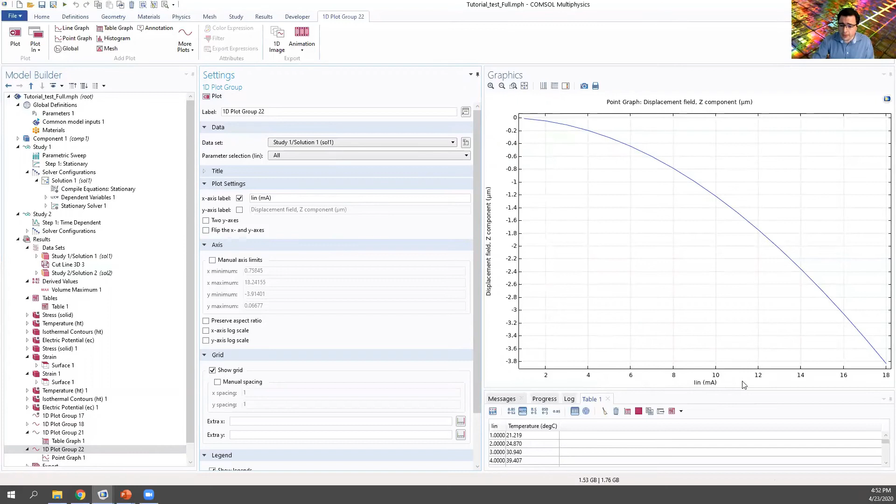And if I hit plot, this is telling me, okay perfect, look, for my different currents in milliamps, 2, 4, 6 — and if you want to change the milliamps, you just go to label and just say the units, milliamp. And now we have the milliamps here. For different currents, I'm having a displacement of -1, -2, -3, and the maximum displacement is going to be -3.8 micrometers for 18 milliamps.

So now we understand what is the temperature, look, the temperature — and I can rename this, this is going to be temperature versus current. And this one I can rename, this is going to be displacement versus current.

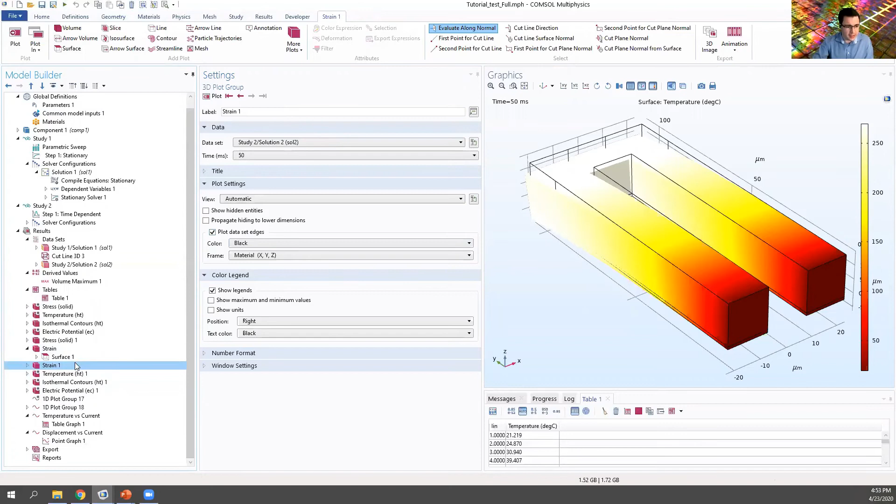And the last one I'm going to generate is, I'll duplicate the strain. I'm going to try to evaluate the three things: the temperature, the stress or the strain, and the current versus displacement. That's what we need. So I have from the stress, the stress solid, usually the von Mises simulation that COMSOL gives you. I'm gonna duplicate this one and do a little modification, call it the strain of the material as the original, the Strain3. I already did other strains.

What I'm going to do is, instead of doing a surface from the parent using von Mises, I'm going to use a different method to calculate the strain. It's not going to be a numerical approach, I'm not interested in the number, just an approximation of what's happening with the strain. I want to know where we have tension and where we have compression. So in solid mechanics, I'm going to select the elastic strain tensor, the 2-2 component. Let me verify I have the elastic strain tensor, EEL22, yes, okay.

So in my elastic strain tensor, now I can see the strain in the material. Again, this is a qualitative approach, and I'm not very concerned about the numbers or units. It's just the model in Y, the 2-2 is the Y component of the strain tensor.

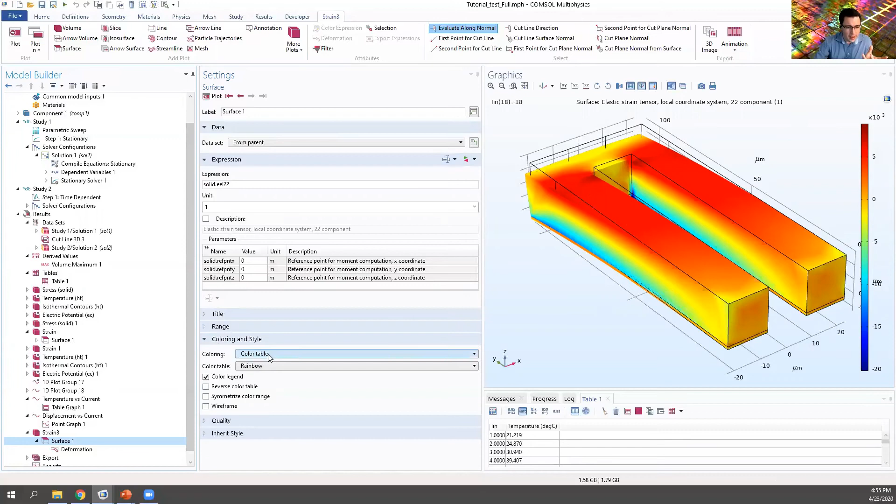And I want to see it in a different way. Instead of rainbow, I'll show the wave, because the wave shows positive as red and negative as blue. I'll set symmetrize color range, so it's going to be positive and negative, using the same value, -20 for negative and +20 times 10 to the -3 for positive.

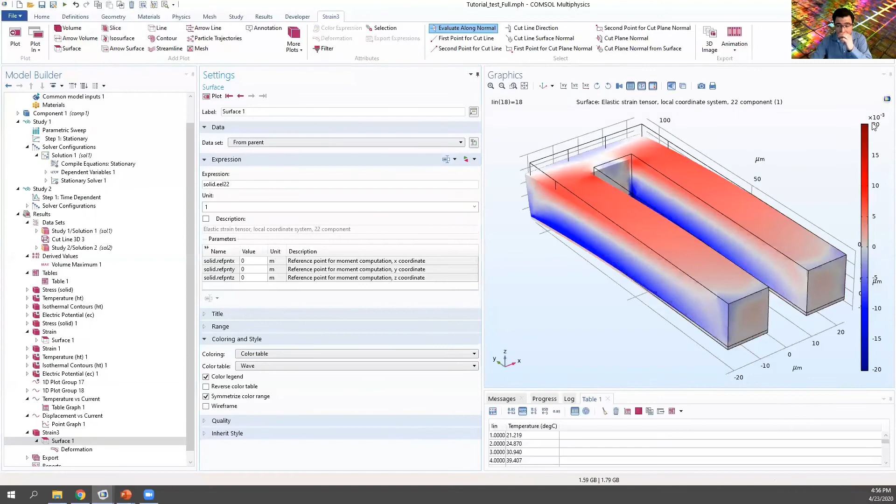So what I have now is, for the different currents, an indication of where we have strain, tension shown in red and compression shown in blue. For the two films, it's very different. This gives me a graphical representation of what's happening in the field. I have tension on the polymer at this point, and this polymer here is under compression. Using this information, since I did a parametric sweep, I can use the player.

I can create a nice simulation or video of at least 25 frames at different currents, showing what's happening with the beam, and if I play it again, how the strain behaves at different currents.

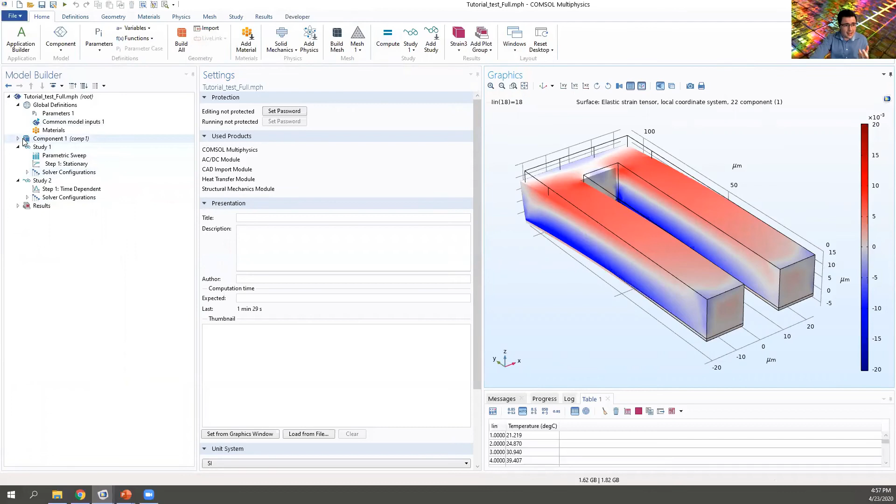So to summarize and open the floor for questions: we used the Joule heating approach that COMSOL has built in to couple solid mechanics, heat transfer, and electric currents into a Joule heating actuator. We pass currents to heat up this conductor, which deforms the passive layer and causes it to start bending. With that, we can understand temperature versus current, displacement versus current, and ultimately how the beam behaves, where we have tension and where we have compression. That's exactly the goal of this tutorial.

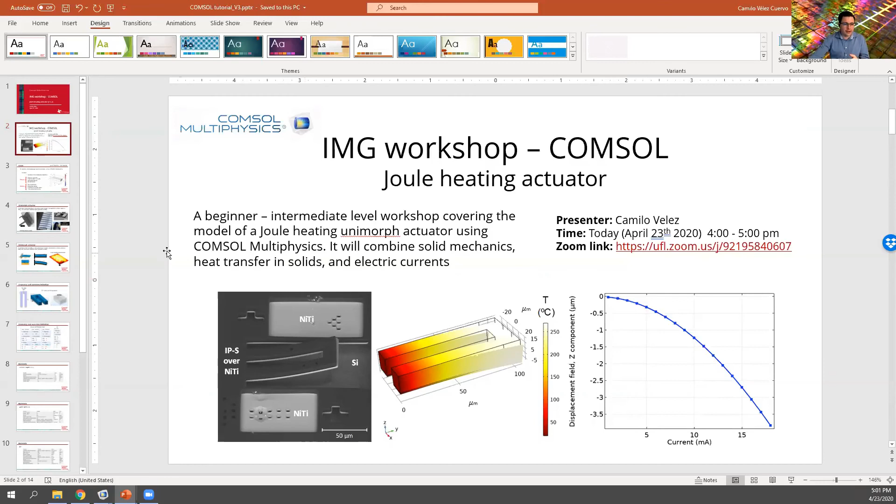A simple thing you can use is run the model without running any specific physics. So for example, run the easy one, the DC. Run AC/DC with a variable called temperature, and temperature is a quadratic function of the pressure, for example. I don't know, I'm just making up things.

So running the electrical current, you're going to have a solution of that specific variable, even if you are not using that variable there. And you will have an evaluation of what the variable is doing at different temperatures without damaging the model. Once you verify that your model is accepting that inner variable, you can do it.

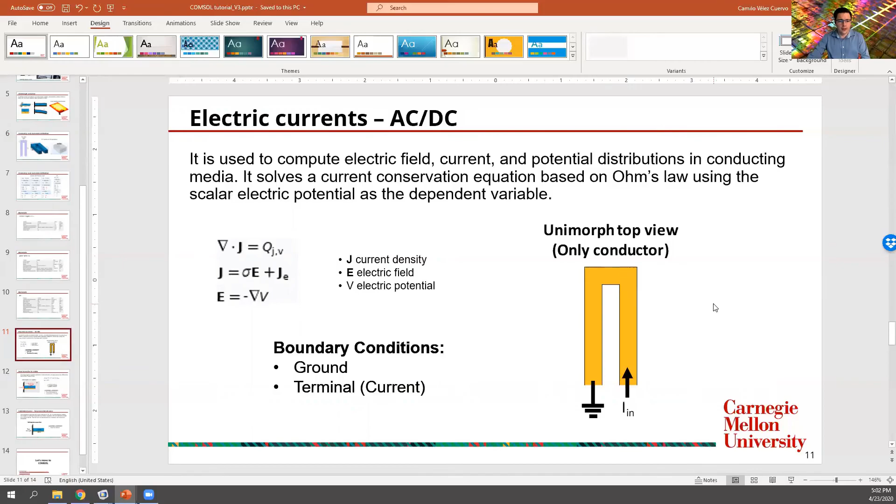One way we tried to use it in the past was in magnetic materials. But we observed that instead of doing a parametric simulation with a function, it was better just to define it in global definitions—sorry, not here, in component, inside the component and definitions, to define a function here.

So do not run the study based on that function, run the study based on a parametric value, but compute the function value. For example, a function x squared of something—just create the function x squared, but do not try to run parametric to the function, run parametric to x, and calculate all the time x squared. That seems to work a little faster for COMSOL.

Okay, yeah, I'm having some issues with my own simulation now, so this is helpful. We can see it offline if you want.

Yeah, sure. But anybody else, do you have any questions? Come on, this is one of your few chances to ask tons of questions about COMSOL.

And the last piece of advice is to go use the other sources of documentation, which are very powerful, use examples that are already there, and use the webinars that COMSOL offers. Please, everybody working with COMSOL needs to register on the COMSOL website. Your group, IMG, is paying a lot of money for the license, so everybody can just send an email and ask questions. Of course, the better you understand your model, the better the answer you're going to receive.

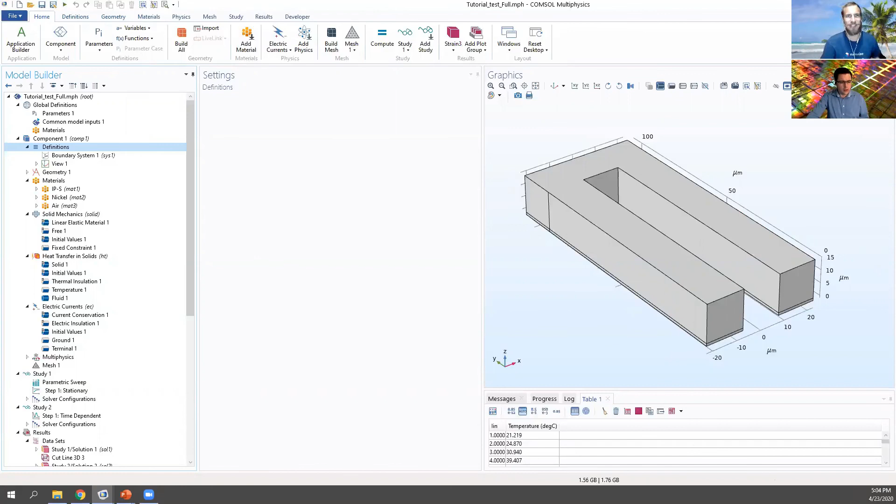Here is my information: cvelescu@andrew.cmu.edu. I'm going to send this information to Kartik today, but you can copy it and make a print screen of this. Okay, oh yeah, print screen.

Please feel free to contact me if you have any trouble with the simulation. I may have solved a similar problem already, or I can point you in the right direction.

And COMSOL during this quarantine is doing some very interesting workshops and seminars. This week, for example, they started a workshop series on magnetic coils, AC/DC for coils and magnetic applications—very interesting, one week of only AC/DC for magnets. They're going to bring several workshops and tutorials in the upcoming weeks.

So please join the website, put your email there, and you will start receiving the information. You will find something very interesting, especially since COMSOL changes one version of the software every year.

It's adding more functionalities. Just a quick anecdote: by the end of my PhD, COMSOL finally released a variation on the magnetic modules that made sense of all my simulations from five years ago. I was doing it manually in COMSOL until the last year, like three months before graduating. They just released an update and said, oh look, everything you did with so much pain is here in a new update. It was kind of nice, so please be conscious that this is software evolving with the researchers, and it's very cool to receive the most updated information.

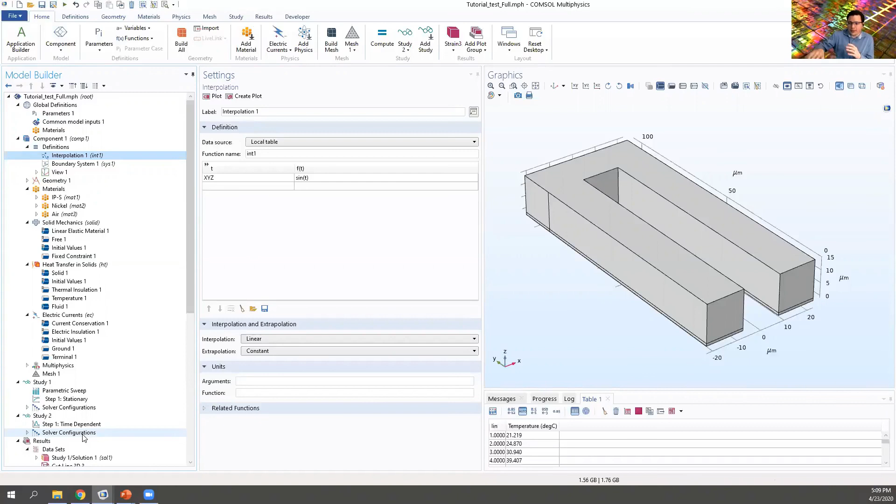It's simple. The other thing you can do is, you don't need to have everything in the same study. You can run a portion of the study, make another study with a different condition, and run it again after the second study, and so on. So if you finish one portion of the study, you can save it and already have that data, then move to another study and generate more data. And if something crashes in between, you've already saved most of the information.

This is quite useful, I didn't know about running them separately. This quarantine time has made me do a lot of simulations. I was doing experiments only earlier, but this is a nice time to do simulations. Yeah, it is a nice time. Please take advantage of this, and this is fun, because remember, this is research, and this is also an experiment. You just need to be more careful with the experiment, because you're going to start spitting out data like crazy.

Can you trust your data? Well, make sure the results are accurate. How? Make a small test, make little experiments that prove you right or prove you wrong. Use the same method you're using in your lab here. You'll see that you generate a lot of information, but you're combining it very nicely and very fast. It's a very powerful tool. I definitely love it, love it.